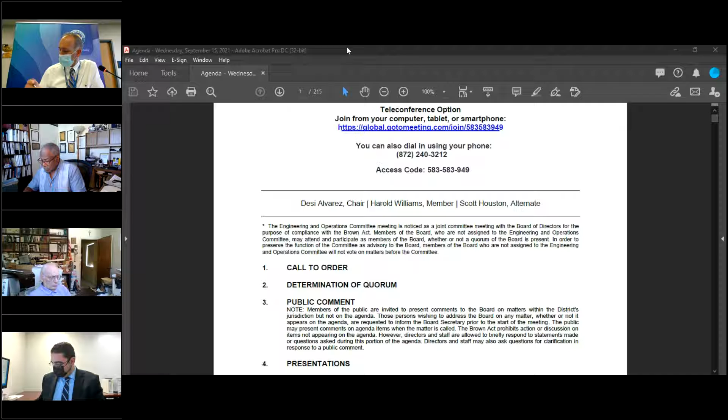Okay, we will move on to the action calendar. The first item up is item 5A. Mr. General Manager, would you like to introduce that item? Yes, Chairman Alvarez. Item 5A is a funding request for service connection WB-23 relocation. This item is related to authorizing the General Manager to have Metropolitan Water District develop a bid package for the relocation of a potable water service connection. Today we have Frank Fuchs, our Operations Supervisor, here to present this item.

Thank you, EJ. Good afternoon, directors. If I can please refer you to page 3 of your board packet, the purpose of this board memo is to request approval for additional funding of a project to relocate a Metropolitan Water District potable water service connection that serves Golden State Water Company in Culver City. I would like to highlight that this project is fully funded by Golden State Water Company. All Metropolitan Water District costs associated are passed on to Golden State Water.

Back in 2018, Golden State Water Company requested that the existing service connection WB-23 be relocated from the current Metropolitan Water District Culver City pipeline feeder to a separate feeder identified as the Sepulveda feeder. Golden State currently has a total of 3 potable water service connections that serve Culver City, and they are all served from the same Culver City feeder. In order to have backup supply when the Culver City feeder needs to be shut down, Golden State Water Company requested this project to relocate the WB-23 service connection to a different feeder, the Sepulveda feeder.

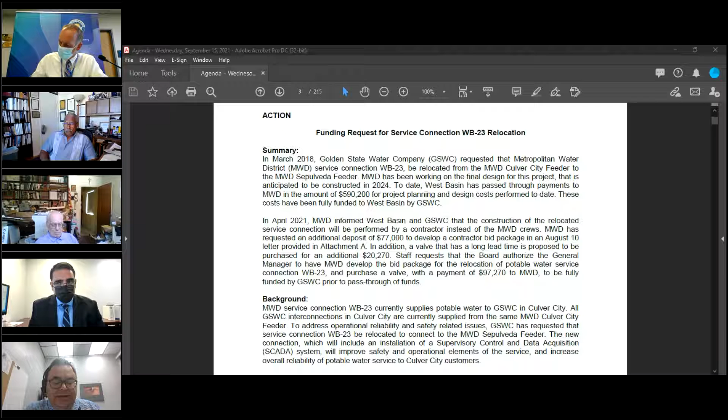A cost estimate of the project is shown in Attachment B of the board memo, and Metropolitan Water District has been charging for tasks as the project progresses. Again, all these costs are passed through to Golden State Water Company. The estimated project cost is $3,236,800. To date, West Basin has passed through payment to Metropolitan Water District in the amount of $590,200 for the study phase, preliminary design, and final design of the project.

Recently, Metropolitan Water District indicated that the construction work would be bid out instead of constructed by Metropolitan Water District staff as they had initially estimated. Unfortunately, Metropolitan Water District doesn't believe they will have the staff available to implement that work in-house. As a result, there will be an additional cost to update the design drawings and also develop the bid documents, for a total of an estimated $77,000.

In addition, a valve that has a long lead time will also be purchased for an additional $20,270, and therefore Metropolitan Water District is requesting an additional $97,270 for developing the bid documents and also for the purchase of this valve.

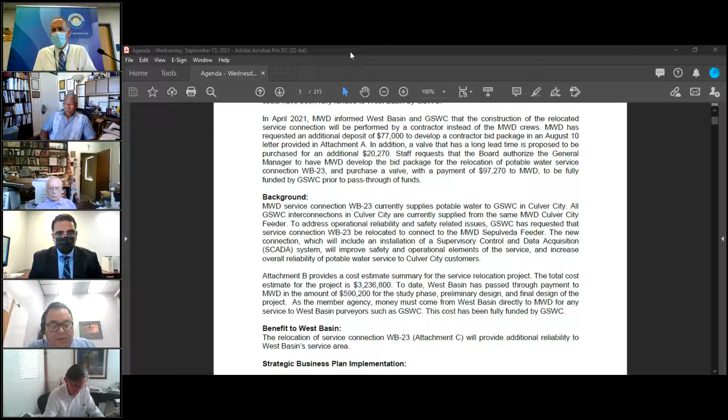I also want to mention that Golden State Water Company has already provided a payment to West Basin for that full amount. So now I'll read the recommendation: that the board authorize the general manager to have Metropolitan Water District develop a bid package for the relocation of potable water service connection WB23 and purchase a valve, with payment of $97,270 to Metropolitan Water District to be fully funded by Golden State Water Company.

With that, I'd be happy to answer any questions. All right, thank you very much. Any questions from the committee members?

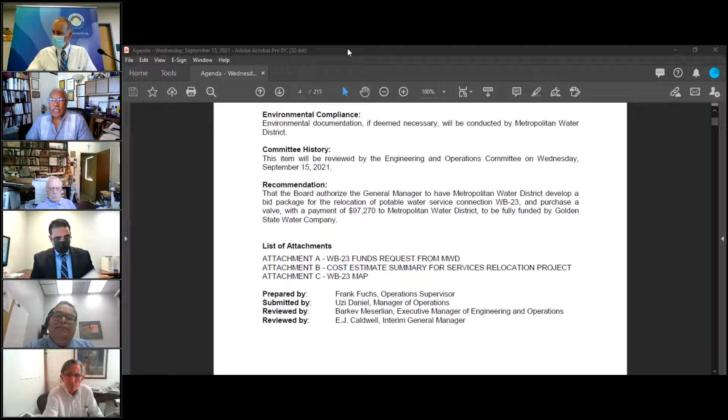Yes, Mr. Chair. I had a little interference and couldn't understand, I guess you would call it for this project, the fiscal impact. Am I to hear that there'll be none for this, for the district? Correct. All of the costs associated with the project are essentially passed through, Director Williams. Okay, well, thank you.

Okay, any questions from any other board members? Okay, seeing none. I have a follow-up question to Director Williams' question.

Since the overall project is a little over $3 million, and right now we're at the first part of this, and total payments are going to be an additional $97,270. Did I hear it correctly that Golden State has already given that money to the district, or is that going to be given? The additional $97,000 has already been paid by Golden State to West Basin.

So we already have a check in hand from Golden State for that amount. And then do we have an agreement with Golden State signed that says they will be fully responsible for the entire project cost? The way that Metropolitan Water District implements these projects is they initially provide just letters that identify the costs for different phases, but there will be an agreement before the construction is implemented between Metropolitan Water District and West Basin. And so we would have a similar agreement with Golden State before the construction starts.

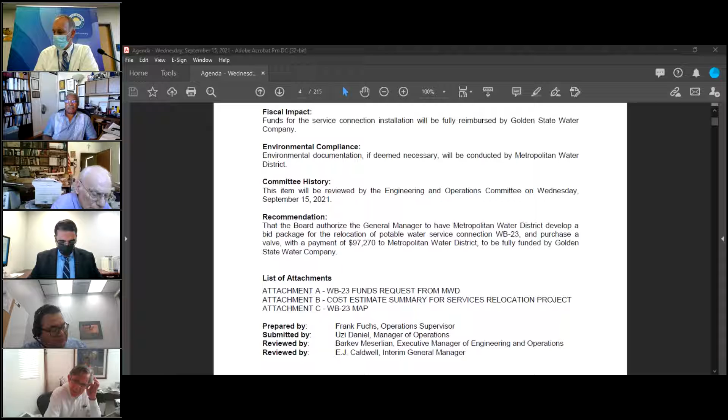Okay. If there's no other questions, should we move this to the full board, Director Williams? I concur. Okay, so this item will be considered by the full board at the next board meeting. Next item up is item 5B. Mr. General Manager, would you like to introduce that one?

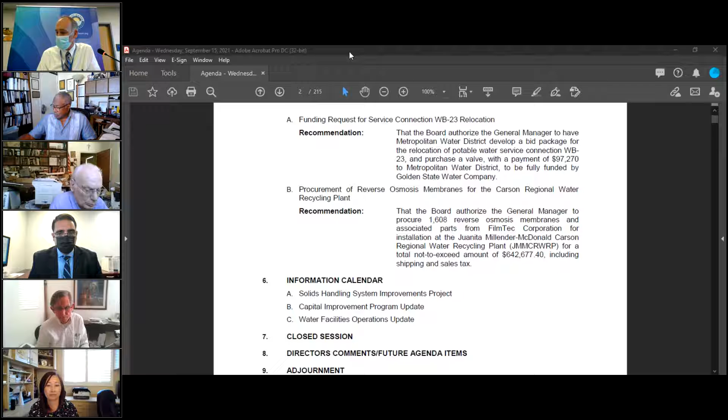Yes, thank you, Chairman Alvarez. The next item, 5B, is a procurement of reverse osmosis membranes for the Carson Regional Water Recycling Plant. This is related to the procurement of 1,608 reverse osmosis membranes. And for this item, we have Susanna Lee, our Senior Operations Engineer.

Thank you, EJ, for introducing this item. And good afternoon, Chairman Alvarez and members of the board. You can find a copy of the memo on page 9 of the packet. If you recall, it was mentioned during the July and August operation monthly updates that there will be a few upcoming membrane replacements. And so this item is the first membrane replacement action item for fiscal year 21-22.

Specifically, as EJ had mentioned, this action item is for replacement of the RO membrane at Juanita Millender-McDonald Carson Regional Water Recycling Plant, which I will refer to as JMM for short going forward. And as you're all aware, West Basin produces boiler feed water for Marathon Refinery. The RO system at this facility consists of 4 RO trains with a total of 1,584 RO membranes.

These membranes are 5 years old, because they were replaced in 2016. And they're due for replacement because they're reaching the end of their useful life. This is supported by our monthly review of the membrane dashboard, which shows the performance of the membranes is deteriorating, especially for a couple of water quality parameters, which are approaching the contractual limits.

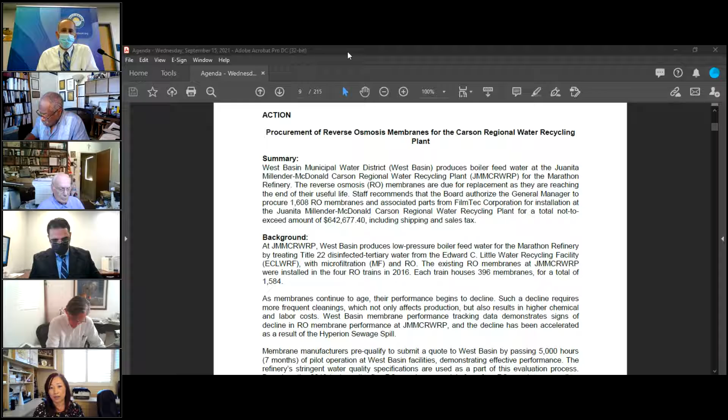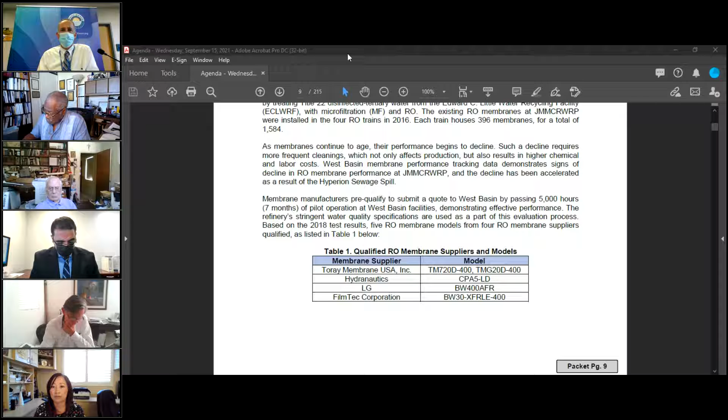Staff issued an invitation for quote to the 4 qualified membrane manufacturers on August 19th, and West Basin received quotes from 3 manufacturers. The lowest responsive quote is from FilmTec Corporation, as you can find the details of the quotes on page 10 in Table 2.

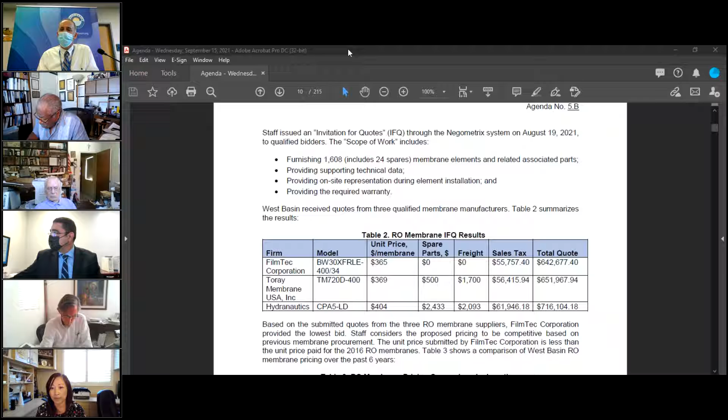Staff reviewed and considers the proposed pricing from FilmTec to be competitive based on previous membrane procurement. You can find those quotes and pricing on page 10 in Table 3 of the packet. The unit price from recent procurements ranges from $345 to $398 per membrane, and the unit price submitted by FilmTec is less than the 2016 unit price West Basin paid for the existing membranes. They also proposed the same price as for the Chevron RO membranes purchased in 2020.

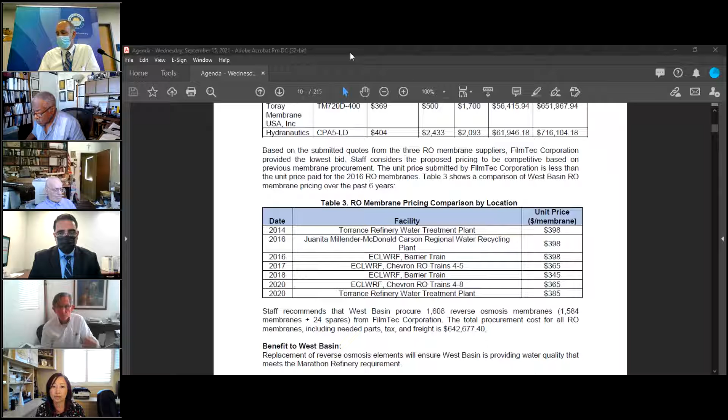So staff therefore recommends that West Basin procure 1,608 RO membranes, of which 24 are spares, from FilmTec Corporation. I would like to read the recommendation that the board authorize the general manager to procure 1,608 reverse osmosis membranes and associated parts from FilmTec Corporation for installation at the Juanita Millender-McDonald Carson Regional Water Recycling Plant, for a total not to exceed $642,677.40, including shipping and sales tax.

I'll be happy to answer any questions.

Okay, thank you very much. Director Williams, do you have any questions? Yes, I'd like to ask Barkev: are you totally satisfied with this? You have reviewed it, and this meets all your high standards?

Good afternoon, Chairman and President Williams. Absolutely, yes. The replacements are based on the information we have and the tracking we do, looking at the pressures, the water quality, and the contractual specifications we have to meet with our customer. We need to do this. So to answer your question, yes.

Okay, well, thank you, that's all I have. Okay, thank you. Any other board members have questions of staff? No. All right, seeing none, I've got a couple of follow-up questions.

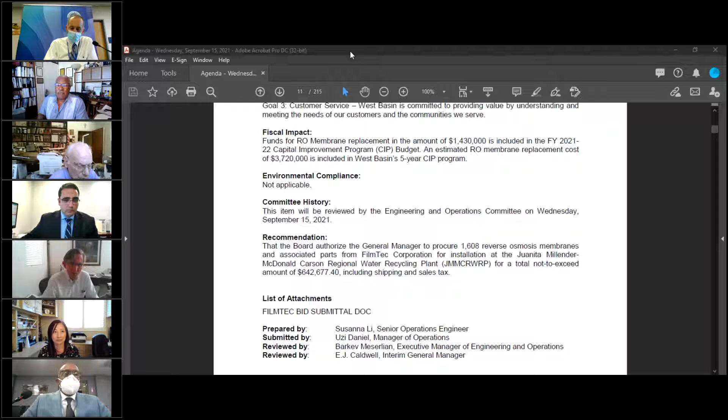It was mentioned that part of the reason for replacing the membranes is due to the upset at the Hyperion plant. Can you expand on that a little more? And as a result of that upset, is the replacement of these membranes being accelerated because of the extra duty they had to serve?

Prior to the event—let me step back. These membranes are 5 years old, and that's our normal useful life. So we were planning to replace these at the end of this calendar year rather than now. But knowing that we already saw a couple of constituents increase in concentration over the last 2 months, we know that the extra cleaning we did over this period contributed partly to these increases. So these membranes were set to be replaced, but we're just replacing them a couple months earlier.

Does that answer your question? That answers my question, and then a follow-up on that: would you be able to quantify what that additional effort is?

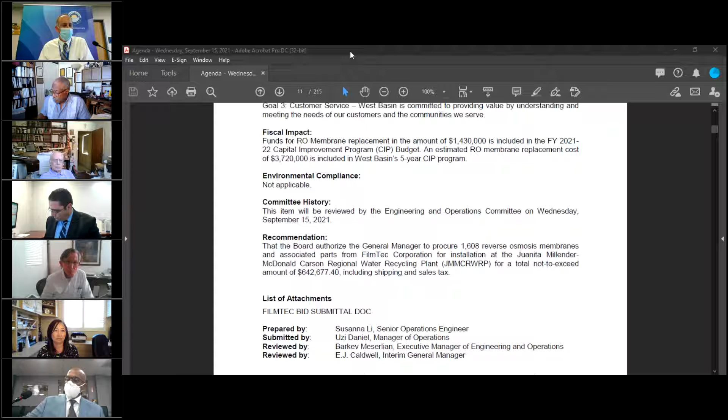Okay, next up is the information calendar. We have 3 items. The first item is the solids handling system improvements project. Mr. General Manager, would you like to tee that one up? Yes, thank you very much, Chairman Alvarez.

The next item is 6A, our solids handling system improvements project related to the RFP for services. As you may recall, at our July Engineering Operations Committee, this item did come up as part of our capital improvement program update. It was decided at that time, direction was provided to staff to continue to work on the draft RFP and bring it back to a future E&O committee for an update. We have that item for you today. Presenting this item will be Wendell Johnson, our Manager of Engineering.

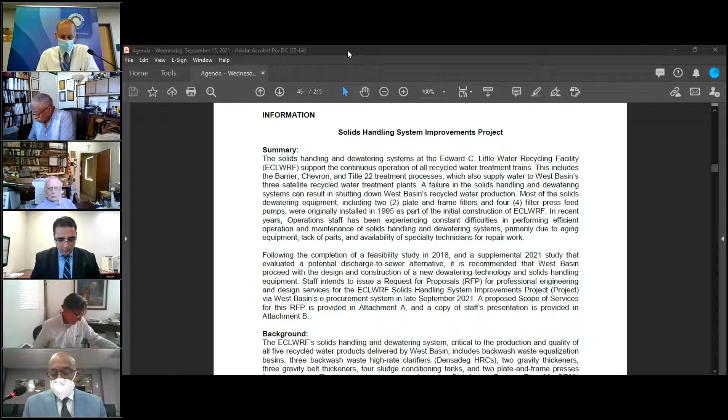Good afternoon, Chairman Alvarez and members of the committee and the board. Could you please turn to page 57 of your packet? I'm here this afternoon to provide the committee with information on the Edward C. Little Water Recycling Facility Solids Handling System Improvement Project. I will refer to it as ECL from this point going forward.

As you recall, in the July E&O committee meeting, Kevin Cullen provided a project update. The E&O committee provided comments and also requested to review the scope of services for the RFP for engineering services. I have attached a copy of this scope of services, which begins on page 48 of your packet. I'm going to go through some additional slides to remind you of the project and provide some additional information requested by the committee. Next slide.

The solids handling system at ECL is part of the backbone of the recycling water program for all the products that the district produces. Solids are generated from almost every process in the production of recycled water. The solids consist of total suspended solids, biochemical oxygen demand components of the wastewater, as well as chemicals added to facilitate the processing of recycled water.

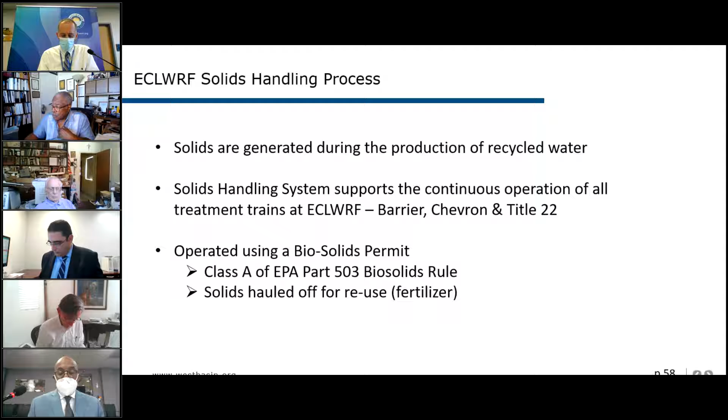This is an overview of the solids handling process. If you go to the rear of the ECL facility, you'll see a 2-story building, the tallest building on the facility, and that's essentially the dewatering building.

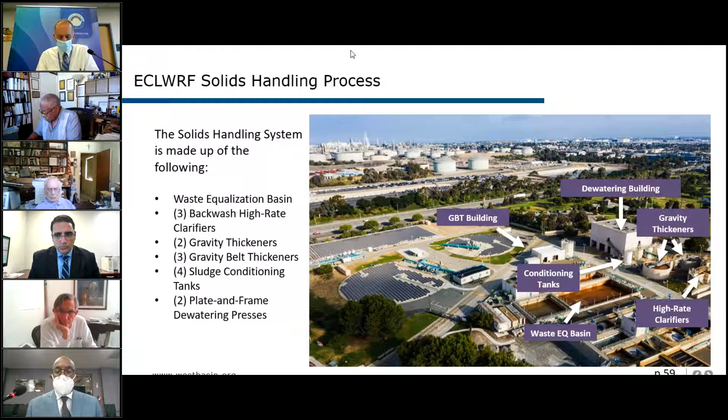The solids handling system includes the waste equalization basin, the high rate clarifiers, gravity thickeners, gravity belt thickeners, sludge conditioning tanks, and a plate and frame filter press for dewatering. There's a schematic on page 131 of your packet, which shows the flow of the water through the system. Next slide, please.

About the equipment - it was originally installed in phase 1, the original construction of ECL. It was retrofitted in 2007, which increased the capacity to handle solids from 50 tons a day to about 75 tons a day. The filter press and the feed pumps are the bottleneck of the system.

Generally, throughout the system, there's redundancy, except for when you get to these 2 elements that handle the dry sludge at the end of the process. The filter press and the feed pumps have been out of production since 2000. Spare parts are made to order, and they take about 6 to 10 weeks to delivery time.

The useful life, according to the State of California Controller's Office of Utilities, states that the useful life of this type of equipment is about 15 years, and this equipment has been in service for about 27 years.

The process is not automated. It is a hand process where you have to send an operator up to the facility to do what is known as running a batch, where the batch of sludge is dewatered and it's dropped directly into a waiting truck to be hauled away.

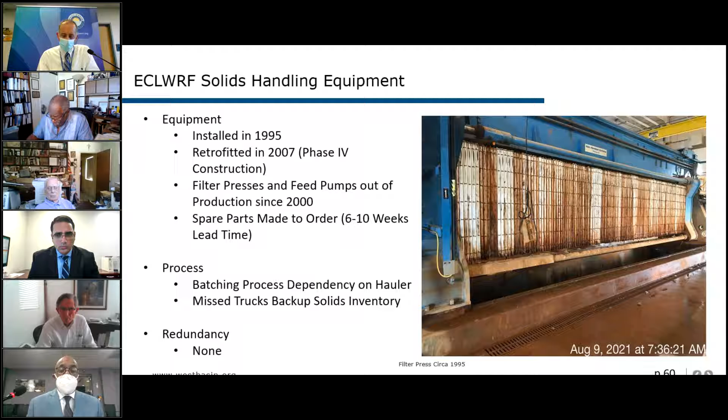In July of 2018, we completed a feasibility study and a condition assessment study. It was comprehensive. The study itself cost about $213,000 to produce, in addition to just a condition assessment of all aspects of the equipment that was in the solids handling process. It also took a bench scale testing of the pH compliance.

You have to take the sludge from about a 7.9 to 12 in order to transport the sludge, and this is accomplished by adding either a slurry lime or a dry lime to the system.

The report also took a look at 5 different possible alternatives of replacing the equipment and what the process would look like. It had a full-scale centrifuge pilot testing where a centrifuge was brought to the facility and operated for approximately 7 days, taking actual sludge being produced at the time and dewatering it to see how effective that system was.

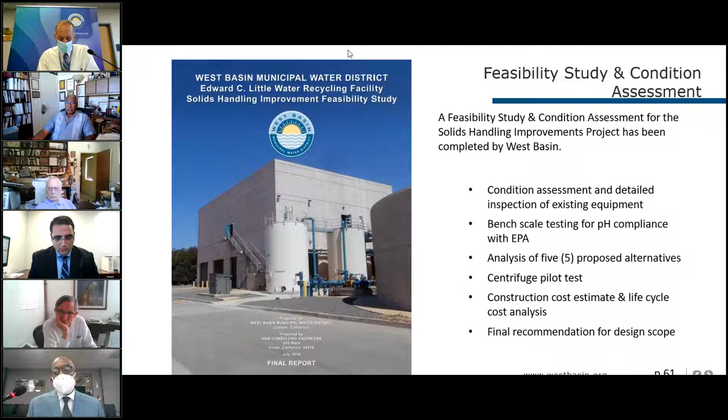Some of the conclusions of the study include that the buildings are in good condition. You have 2 buildings out there: the dewatering building as well as the sludge gravity belt building. The majority of the solids handling equipment is beyond its useful life, most of it originally supplied or part of the original construction of the facility.

The pH compliance could be achieved using lime slurry, dry lime, or caustic. There may be savings to switching the operation to dry lime because you're transporting less liquids to the landfill. So the recommended dewatering technology is a centrifuge with dry lime post-treatment used for stabilization of the pH of the sludge. The recommended technology is effective on the thickened sludge, and this was a conclusion drawn from the successful pilot study at ECL.

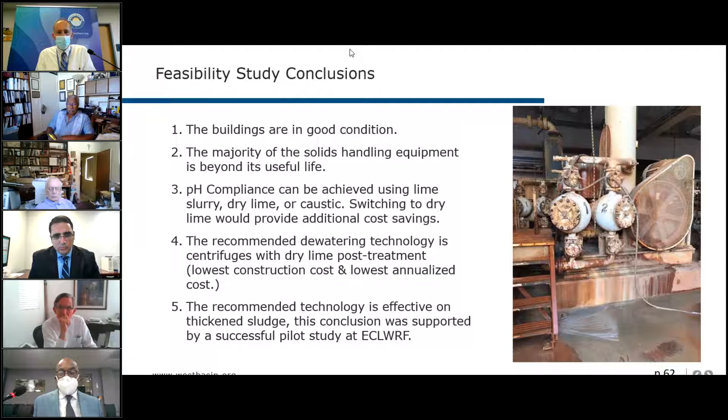In addition, in order for us to do our true due diligence, we took a look at a sewer discharge study, which was a feasibility study to see if the actual solids, instead of having our own solids handling operations at the plant, could discharge into the county facility. This report is included in your agenda packet, on page 138.

The conclusion was based on the conditions: the blending project didn't seem feasible or cost effective compared to the capital project. We had a couple of constraints. We were looking at 3 different waste streams and blending them together to discharge into the county's system, and part of the constraint was the capacity of the existing system. The capacity was only 60 gallons per minute, while our discharges were producing between 116 and 136 gallons per minute.

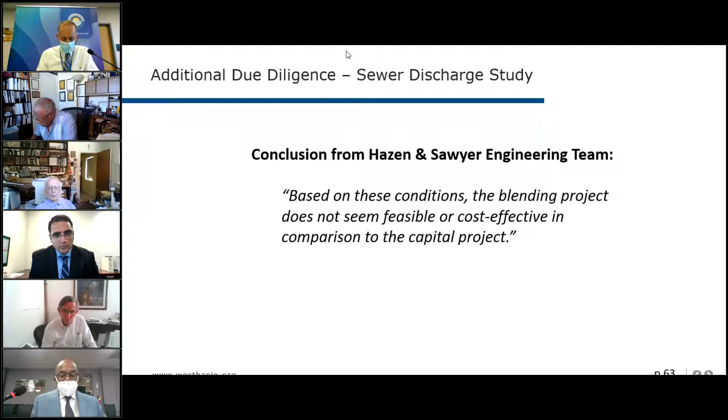We have attached a scope of services for the RFP, beginning on page 48 of your packet. There are approximately 6 tasks involved in the design of this project. You have your typical general coordination and project administration, where they meet with West Basin and Suez and discuss the design and get data back and forth.

The site investigation includes a physical visit to the site to do the preliminary design and layout of the facilities using site constraints, as well as reviewing some of the reports produced along the way, certainly the feasibility study as well as the sewer connection study.

The preliminary design report, or PDR, is approximately a 30% design, where most of the core elements are known about the project, meaning there's a good cost estimate of the project. The process has been designed, the facility has a preliminary layout, and there's cost estimates for the equipment, processes, and cost of operation.

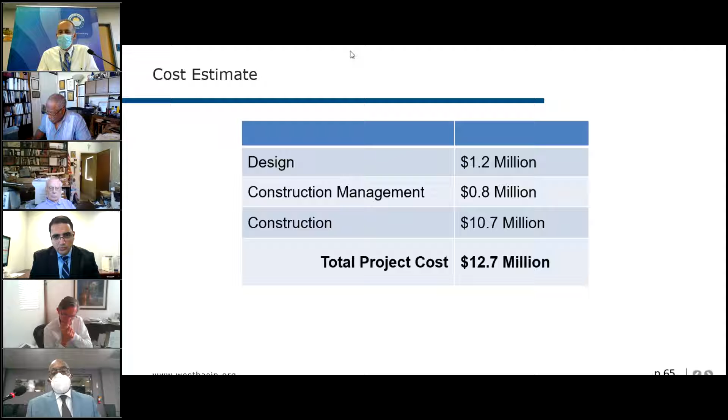So the funding sources, and this is kind of important. In the new contracts for both Chevron and Torrance, there's a capital project charge as part of the rate, part of the monthly service fee that organization pays West Basin. These projects are listed as part of the tasks to be done between 2021 and 2027. The refineries have committed approximately $2.9 million towards this project. Our engineering department will be looking for other grants, to be determined, and approximately $9.8 million would be financed.

Okay, the current milestones for the project. We plan to complete the RFP for engineering services by the end of September. This is one of our stops along the way for comments from the E&O committee. We expect to award a design contract sometime in December, and the final design is expected in July of 2022. We'd like to award the construction contract in the fall of 2022, and the construction period is approximately 12 to 18 months, depending on the supply chain and some of the equipment that's available. So we'd like to see the project completely commissioned in mid-2024.

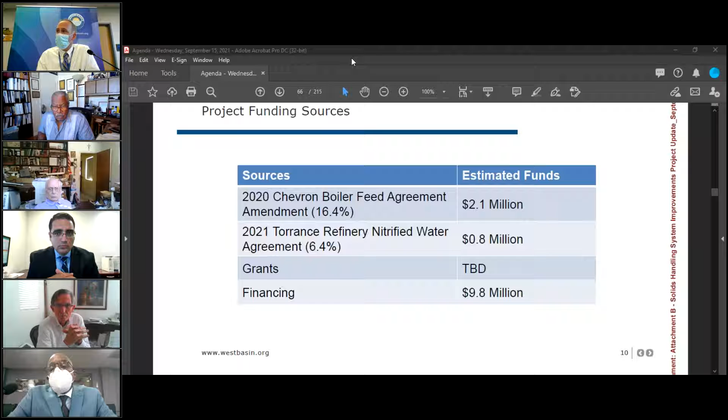I believe in the RFP or in the project study, we're probably looking at how do we get to 70 million gallons per day. It may not be part of this particular project, but we would be looking at space within the facility for future expansion of the solids handling based on the current amount of solids generated at the facility.

Okay, so next question, as a follow-up: both right now Chevron and the Torrance refinery are helping pay for this, but the water produced at the Ed C. Little facility also goes to the Juanita Millender-McDonald plant and is there for the Marathon refinery. So part of the treatment here is also benefiting Marathon. Is Marathon, I don't see them listed here, or are there discussions going on with Marathon to participate in funding this project?

There has been discussions with Marathon, not specifically for this project, Chairman Alvarez, but specifically about putting together a framework to extend their agreement with us. Their agreement with us terms out in January 2025. So they have an agreement already with some contractual obligations for West Basin to give them a certain spec of water, and they do have some fixed charges in there that were based on the original construction of the facility. They do have some commodity charges in there, but because it will term out later in the future, we're not necessarily in a place right now to negotiate this new setup that we have with some of the other refineries.

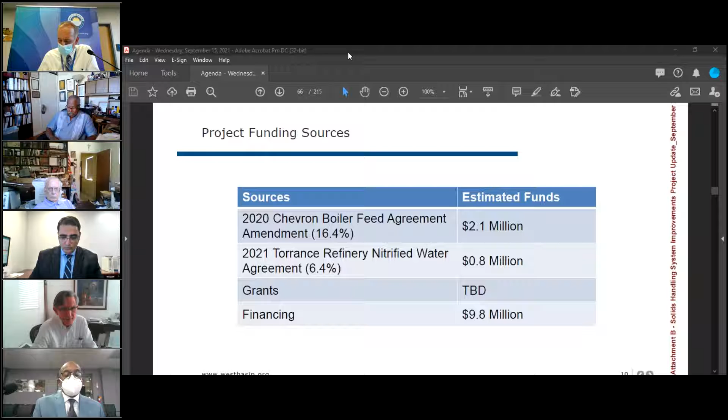I think in the schedule, you guys had shown that you wanted to get the proposal for the design portion out by the end of the month of September.

On that, there is in the RFP a first step, which is the preliminary design report. I think that preliminary design report, specifically for this project, is probably more important than it generally would be.

Whatever consultant is doing the work really needs to focus on reevaluating the solids handling facility, looking at the total capacity of the Ed C. Little plant and the future capacity, because we are limited to a degree. We have quite a bit of land, but we've built on quite a bit of land too, so we have some land limitations. I think long term there is a desire to expand the capacity of that plant at a higher level of treatment than we currently use.

So I would like the proposal to be expanded a little bit more before you guys get it out in the next couple of weeks, to really focus on that preliminary design report so that the consultant evaluates the existing feasibility study, the blending study, other documents, and the overall operation of the plant.

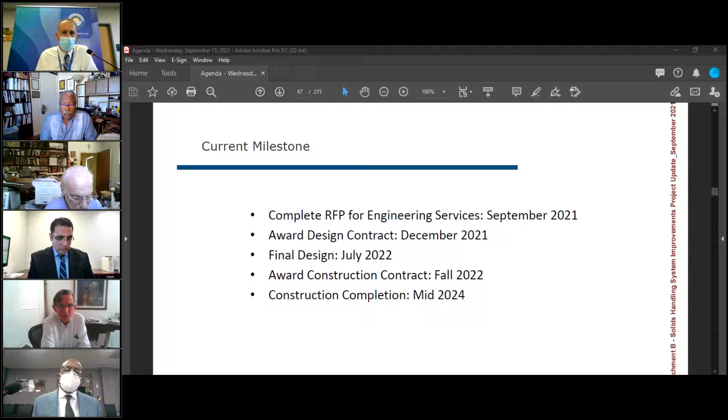Okay. So with that, let's move on to the next item, the capital improvement program update. Mr. General Manager, would you like to tee that one up?

Yes, Chairman Alvarez. The next item, as you mentioned, 6B, is our capital improvement program update. This is a monthly recurring update. And again, we have Wendell Johnson, our manager of engineering, here to present this item.

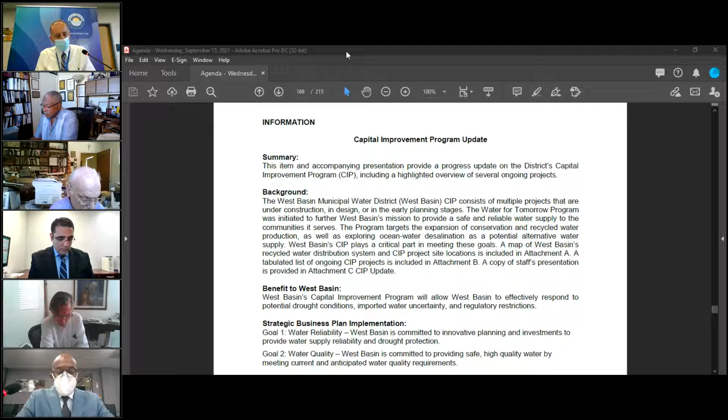Good afternoon, Chairman Alvarez, members of the board and members of the committee. I'm here this afternoon to provide a CIP program update on certain projects in the CIP program. This format is different from what you've seen in the past, and I'm testing the waters with this format. We're presenting projects moving forward, and individual milestones that we've hit this month or will be hitting in the next few months, to give the board a heads up of what projects are coming in the pipeline and where we are in the development of the project. So, next slide, please.

Back in July, I presented on the DLD building, and we were directed by the committee to onboard a real estate appraisal service to look at the value of the building so we can determine what level of capital investment we want to make, or if we want to sell the building and relocate. We successfully brought on a real estate appraisal service through an RFP issued mid-August. They responded September 2nd, and we've got a responsible proposal from a service out of Torrance. We will be moving forward with that. In addition, managers are looking at a needs assessment to determine what square footage each department requires in order to function.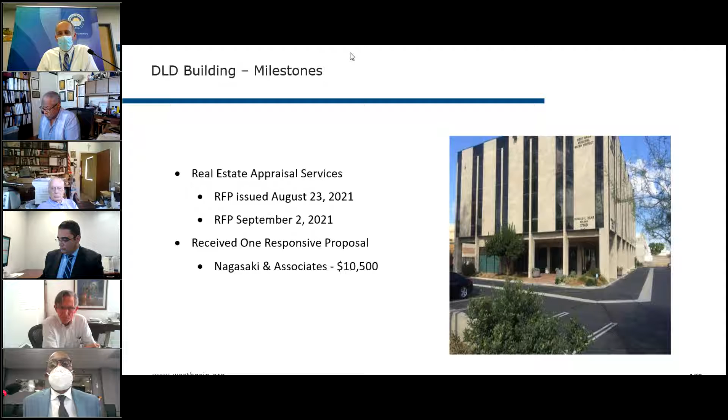If I could interrupt for a second - can we go back to the previous item? On that one, you received one proposal for doing a value estimate of the building. Did you say you're going to move forward with hiring that firm? Correct. Can you please send the board a copy of their proposal? Sure, no problem. Any additional questions? Not right now, just that request. Thank you.

Just an update on something coming down the pipeline in the next month or so. This is a project, a program that's been quite fruitful for the agency - it's called the Harbor South Bay Water Recycling Project. This project is a partnership between West Basin and the U.S. Army Corps of Engineers. There's approximately a $35 million agreement on the first leg of the project that constructed a considerable amount of distribution system for the agency. We're right now reviewing an agreement that we're going to amend, for an additional $35 million for future projects.

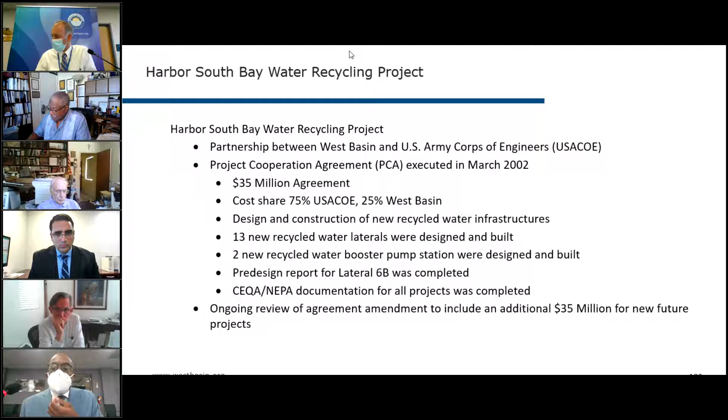This is a list of successful projects that were completed under the first agreement, and we are developing a list of future projects or extensions of the distribution system that we will include in the next agreement with the Army Corps of Engineers. Any questions about that?

Just a clarification - these are projects that are already done? Yeah, these are completed projects. So the $35 million, you're going to identify future projects? Correct. We do not have that list now - we're using the master plan. We don't have that list completed right now, and we're utilizing the recently completed master plan to determine which projects we would place on that list.

And the list is kind of fluid with the Corps. We give them a list of more than $35 million worth of projects, and you're able to put new projects on there, remove some, add additional ones. So it's quite flexible, and it takes a little time for them to get it done. Generally, the $35 million is probably over a 10 to 15 year program time, depending on the value of the project. And the $35 million we talked about earlier, that money's all been spent on these projects? Correct. So the $35 million we're talking about now is a new agreement. We have no money at the Corps of Engineers until this new agreement is executed.

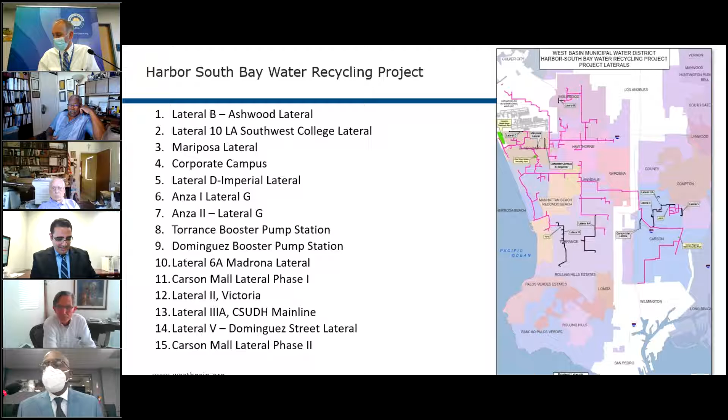All right, with that, let's keep moving on, because otherwise it'll be like other times and we'll end up going way past here. So Wendell, my apologies, keep going. No, your comments are very useful, Director. Next slide, please.

This is an update for the Title 22 converted filter booster pump station. As you may recall, we're in the process of renovating or rehabbing the Title 22 filters. One of the large components of this project is the Title 22 converted filter booster pump station. This project will enable us to increase the filter capacity of the converted filters by 3 times. Currently, we're only using half of the filters because of the hydraulic difference between the filters, and we're only producing 2.5 million gallons a day, and the filters have a capacity of up to 10 million gallons per day. This booster station will allow us to do that.

Currently, we received 100% plans for the project, and that's under review by staff. We're on track to put this out for advertising in October of this year, and we hope to award the contract for the construction of the booster pump station in November of this year.

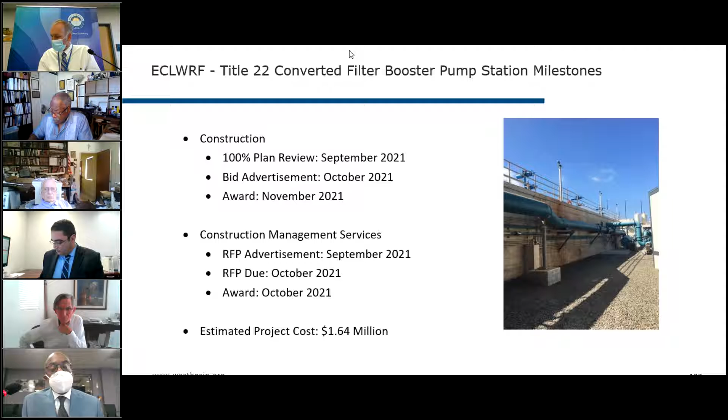I think we touched upon the PV recycled water pipeline project, and this is an estimated time frame of the project. As you may recall from an earlier project update, we talked about splitting the project. It was originally a pipeline and pump station project combined, and we separated the projects this summer, and we're at 100% design on the pipeline.

It's currently being reviewed by West Basin, and it's out to the various jurisdictions in the permit process. We received a renewal from Caltrans very quickly, and I know the county and both the city of Torrance as well as the city of PV will be taking a look at the permitting of the project. That is the critical path to get this out on the streets. We're expecting to start the bid processing in October, November, and hope to award a contract for the pipeline in December of 2021.

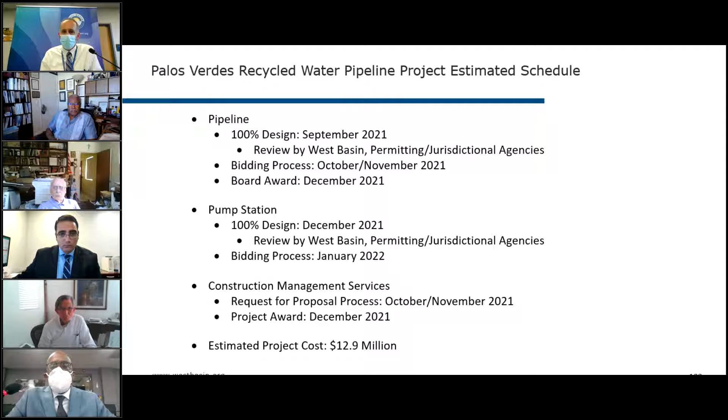Okay. Okay, Wendell, keep going. Next slide, please.

Over at the Torrance Refinery water recycling plant, we have a couple small projects. We had an issue with an eroding channel used sometimes once a year or every couple years during excessive rainfall, which is undermining some pipe supports and has potential to undermine the tank. We've developed plans and specifications for a retaining wall to prevent the erosion, as well as to address a backflow device that has exceeded its useful life—it had to be repaired this year and we were told the device's useful life is coming to an end. The design package is nearing completion, and we anticipate advertising for construction in October of this year. The total project cost is about $320,000.

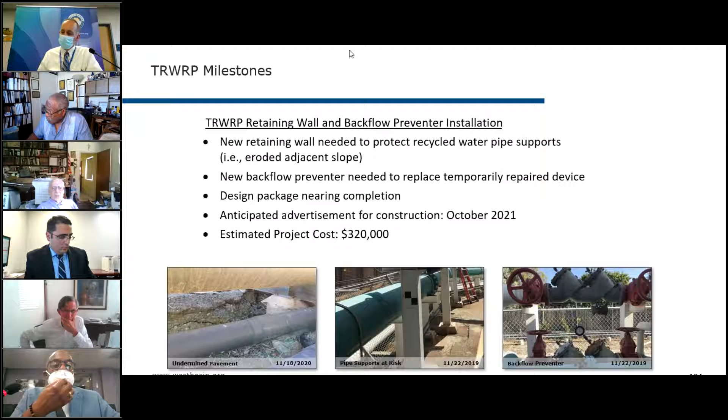This is very visual, one of our most visual projects out there. After a lot of delay with the trucking industry and availability of resins to create the tank, this project is finally coming to near completion. We were able to set the 2 additional tanks—they arrived on the 20th of August and were installed that same day. We're happy to announce this project is coming to an end, and our expectation is that it will be complete and a notice of completion issued by the end of October 2021.

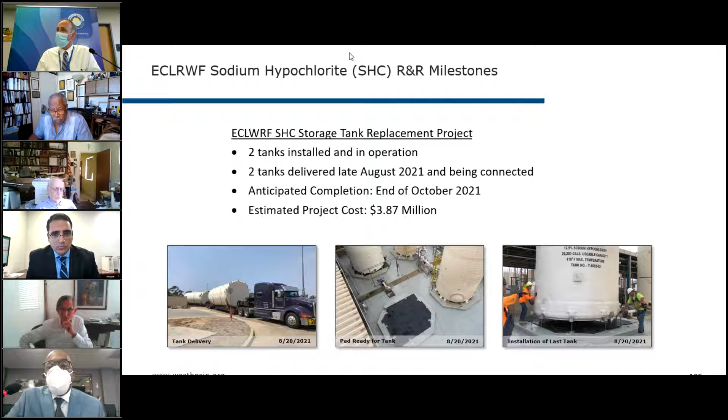Any questions on this project? No. Okay, next slide, please.

This is a heads up project. Recently, during a routine inspection of our facilities, the day tank—which is filled from those 4 tanks shown in the previous slide—was found leaking, and staff is looking at the most economic solution to this problem. The tank itself was installed in 2007 and has about a 15-year life expectancy. We're looking at ways to either repair or replace the tank, and a timeline to do so. It's not an emergency repair, just urgent. This is part of the storage tank project for this fiscal year, but we're moving it up because Suez discovered leaks during a routine inspection of the facility.

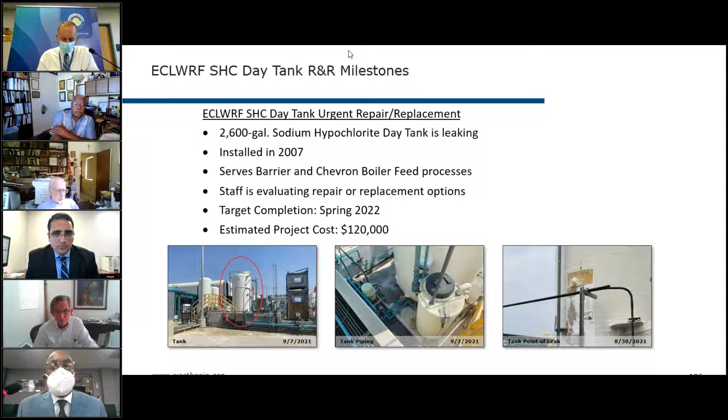Any questions about this project? Next slide, please.

One of our largest projects the department is handling right now is the JMM Carson Phase 2 expansion project. It has finally started to mobilize—we have our stormwater permit in place and our field offices set up. Currently, the contractor is doing potholing, locating the tops of the utilities out there. We also have a partnering session coming up October 1st with key players: West Basin, Suez, the labor compliance group, the construction management firm, and the contractor. This project is starting to get some legs, and we're starting to see boots on the ground. We're happy to report we're moving forward with this project.

Any questions on that?

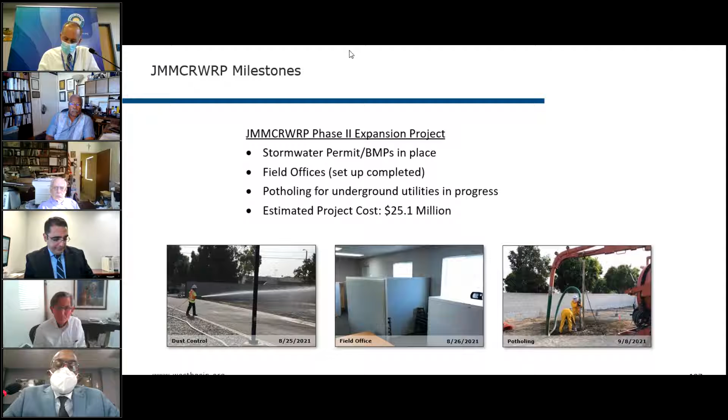We are happy to report that we met with Chevron under the Joint Management Committee meeting, which was in August of last month. One of the projects we updated the refinery about was the solids handling project. We also presented projects that were completed or near completed that are part of their fixed charges for capital improvement, including the Hyperion secondary effluent pump station with new pumps 5, 6, and 7, as well as the storage facility for sodium hypochlorite, the 4-tank farm project. We also talked about the pending CIP and R&R projects going forward, and other needs that are not part of the agreement. We identified those things.

We talked about the West Basin assets on Chevron's property, the background on those tanks on their property, the maintenance agreement, as well as the condition assessment. Our next step is a follow-up meeting in October to continue this dialogue with the refinery to keep them updated on the capital projects. I believe that's my last slide in this presentation.

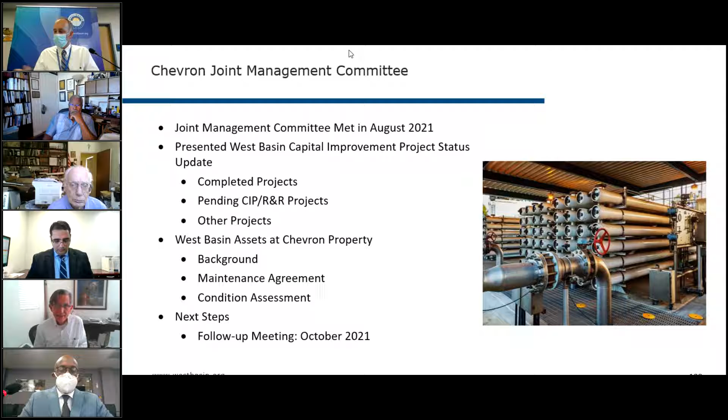Okay, if that concludes that presentation, are there any questions from the board or comments? Okay, seeing none, I just want to point something out to you.

In the projects you just summarized, if I add up all the budgets presented, that's $43.95 million. Most of those are estimates; some costs may come in under, some over. Last year's net revenues after expenses for the district were $9.9 million, so any expenditures beyond that had to come from borrowed funds. This year, net revenues will probably be less because water sales are lower due to water conservation, which overall is a good thing, and we've had additional expenses dealing with the impacts of the Hyperion upset. So our net revenues would have been estimated close to last year's. Without other CIP money that the district may have to contemplate, we're looking at substantially more exposure than the revenues we have. I would like us to really focus on how we're going to fund these projects, or what projects we're not going to be able to do because we can't afford to fund them.

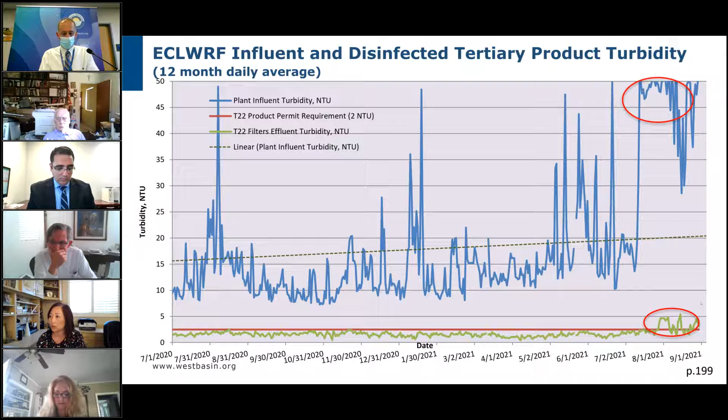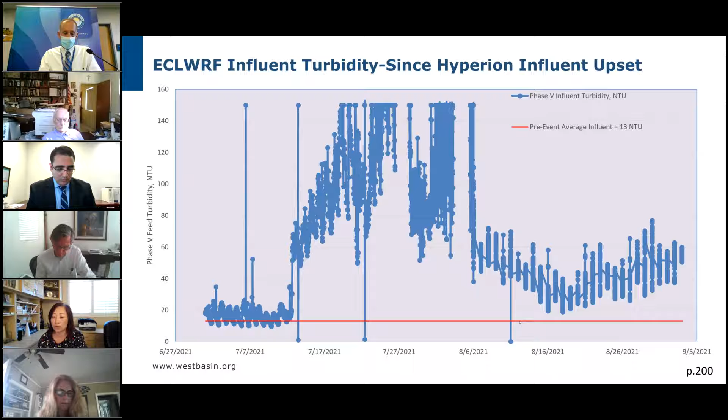The next few slides will highlight where we are operationally, and go over some of the water quality concerns that we're still facing. So we start off with discussing water quality.

As I mentioned, we're still in highly unstable operational conditions. We're seeing 4 times as high turbidity in the month of August and 3 times as high TSS. The significance of TSS, total suspended solids, is that we're producing perhaps 3 times as high solids going through our solids handling facility.

The chart highlights that Hyperion effluent has improved significantly. For TSS, they were as high as in the 300 to close to 400 range, and effluent was up at 150 NTU. But I want to point out that even though they have improved, the water coming into our plant at Edward C. Little is a lot different and is not a one-to-one comparison.

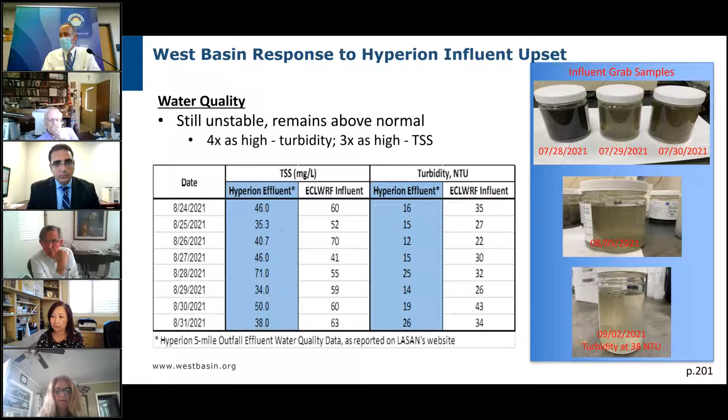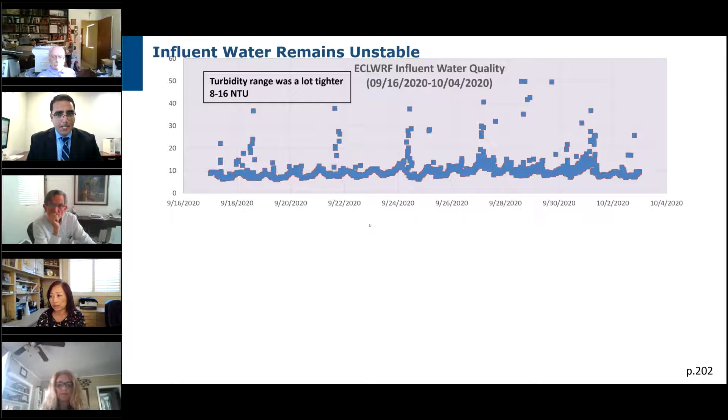Another slide just shows how unstable our water quality still is. This top graph highlights what a normal turbidity range looks like. This was last year, back in September to October 2020, where the turbidity range was between 8 to 16 — a lot tighter compared to what we're seeing currently in August to early September, which ranged between 20 to 50 NTU.

So even though Hyperion water is improving, it's still a long way for us to get back to normal operation mode.

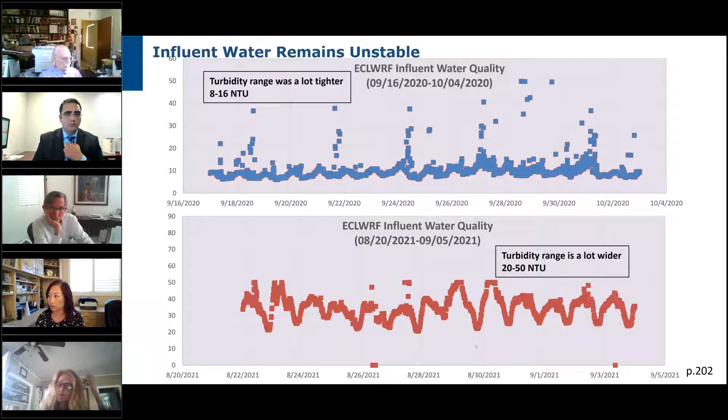Just to go over quickly some of the challenges we are seeing operationally: as I mentioned, water quality is still fluctuating daily or hourly. We see a huge swing between nighttime and compared to morning time.

The second item is the ability to clean all those extra solids. We were seeing 3 to 4 times as much solids coming in. A lot of those solids — one of the difficult challenges for our facility, unlike others, is that a lot of solids are just recirculating within our system, overloading us. So if we miss a truck at the end of the treatment process, it really affects our process up front. That's a huge challenge we're facing.

The third item we're currently experiencing is chemical shortages due to trucking issues and delivery of supplies, particularly ferric chloride. So we have to limit our production currently, which results in using potable water at our satellite facility, as well as internally. We rely on potable water to supplement our disinfected tertiary and other product lines.

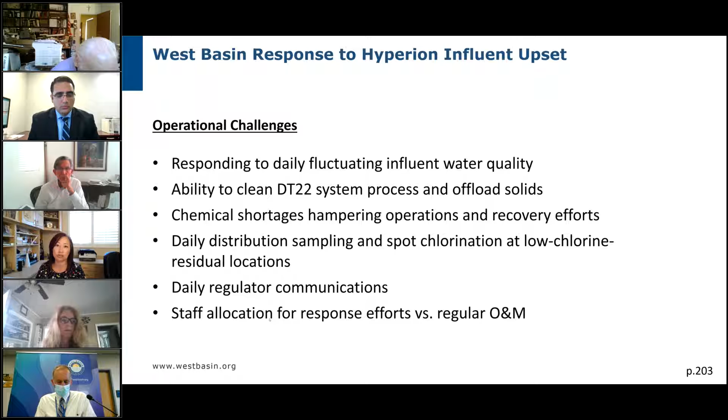And finally, we are just trying to allocate response efforts versus regular O&M, because we still have a plant to operate, and there are regular PMs versus CMs that need to be completed in addition to all the additional response efforts.

Here are some pictures just to highlight what we are dealing with. These are pre-treatment, high-rate clarifier photos — all the solids just get stuck and recirculate in the pre-treatment at the beginning of our treatment process. You can see oil and lots of solids, and even septic conditions.

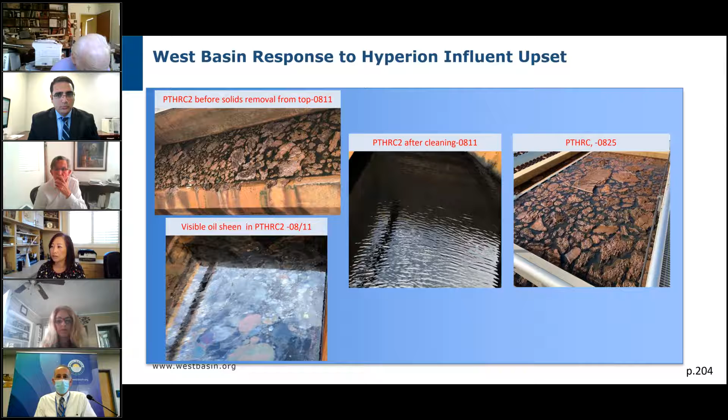Another slide showing photos, even up till the end of August — you can see there's a lot of foam in the filters, and even foam in our phase 4 membrane basin. These foams are fouling our membranes. The phase 4 submersible membranes are due for replacement next year, but we are actively evaluating their performance, and we may need to replace this membrane a little sooner than planned.

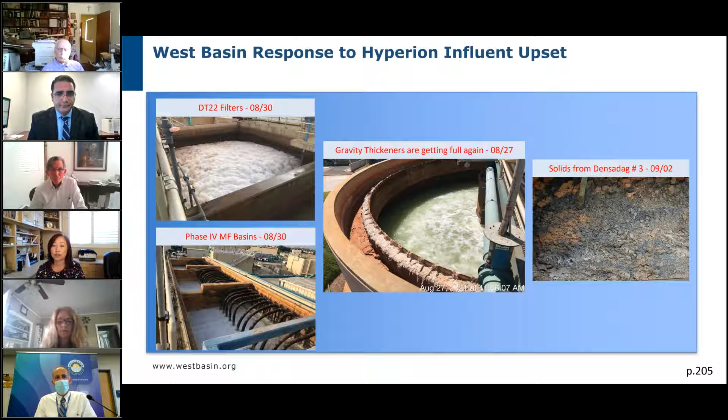And here this is just showing some solids at our back end, and we're trying to remove them using extra vacuum trucks and other ways to help ensure the solids don't get recirculated back to our system.

And here is our monthly maintenance highlights, and I just want to commend the SUEZ staff for keeping our facility up and running, even with all the additional responses.

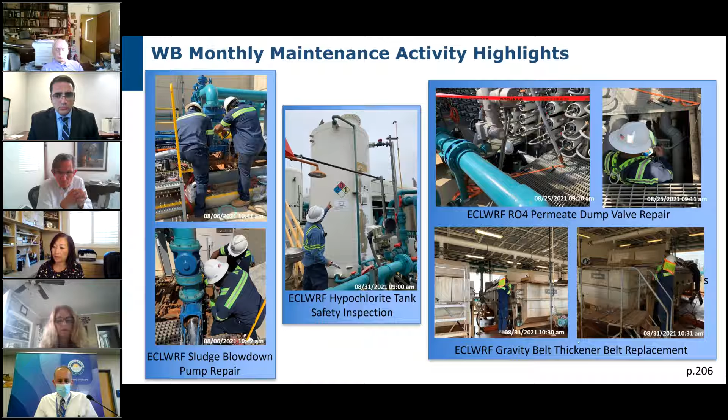Because of the additional solids, it took a hit on some of our sludge handling equipment. These photos on the left show staff replacing a sludge blowdown pump. The photo in the middle is the hypochlorite tank safety inspection where we discovered the tank issue. Finally, on the right, we have items on RO4, one of the Chevron RO trains, a dump valve repair, and a gravity belt thickener belt replacement on the bottom.

With that, I'll turn it over to Uzi to continue with the compliance report.

Thank you, Susanna, and good evening, directors. I'll take this opportunity for another pat on the back to all our operators. As Susanna showed in the update, in addition to all the response and recovery effort going on, there's also regular maintenance and things that come up even on the best days.

Some of you may have heard about the power outage at DWP. That did affect us. On Sunday evening, there was a large accident that took out about 300 customers, including our Hyperion pump station. Staff responded wonderfully, many up until dawn the next morning. This wasn't related to the Hyperion upset, but shows there are other things that come up. It's a celebration not just for operators but for all of us at West Basin, including the board, for showing we are prepared, take pride in our job, and are willing to respond when necessary. We will highlight this event in next month's presentation with some great photos.

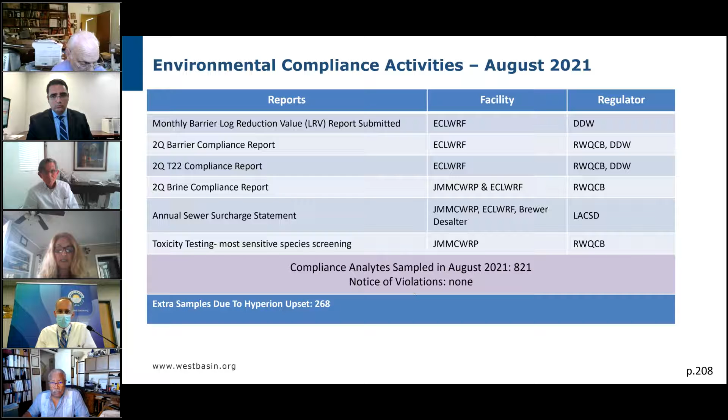I'll also take advantage of this to mention what we submitted as a draft: our 5-year engineering report. That's a very large report required to be updated every 5 years per the permit and groundwater recharge regulations. It was done in-house by Jamie Burkhardt and Susanna as signature. We also utilize our contractor hydrogeologist, which requires review and a stamp from them, but it's a great example of teamwork. We hope to get it finalized and submitted to the regulators, and we're always happy to share it with any directors who'd like to see it. Again, another great effort showing the diligence of our staff.

Next slide, please. And on here, I can go ahead and turn it over to Frank Fuchs to highlight a lot of our customer service and potable water programs.

Thank you, Uzi. Good evening again, directors. As Uzi mentioned, this is our potable water customer service update, starting with the work we support our purveyors with on Metropolitan Water District customer projects. As I discussed earlier in the action item, the first one is a WB23A new service connection, but I want to highlight the project for WB30 and 31.

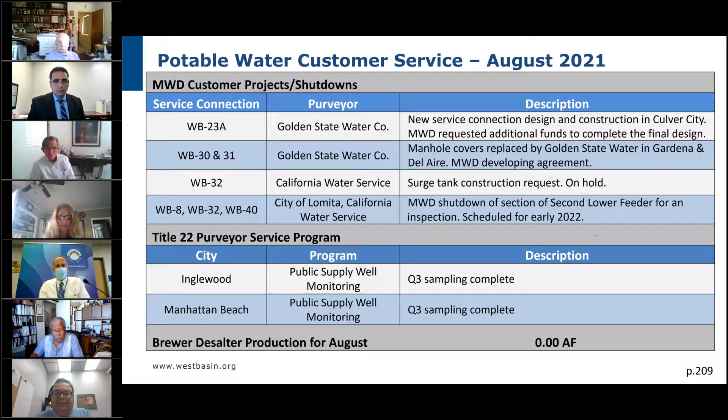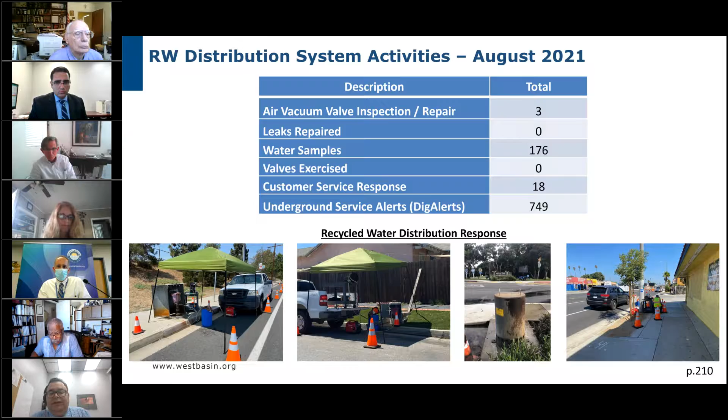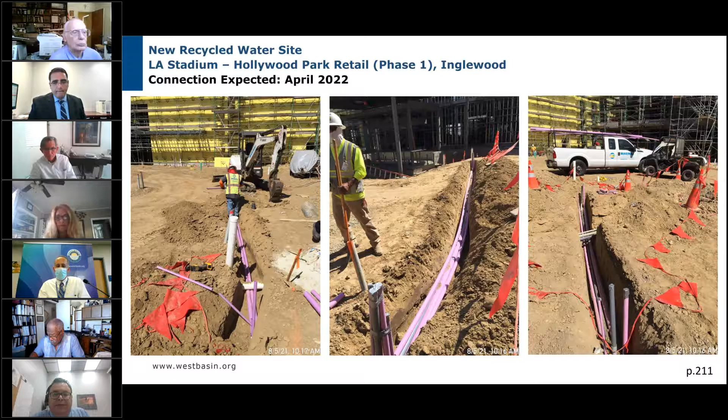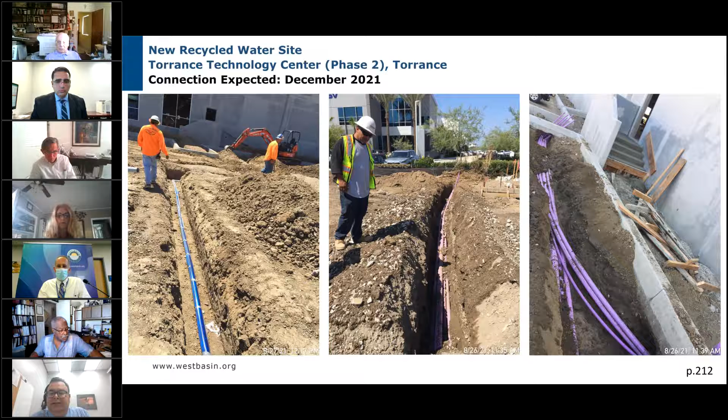Another new recycled water site our staff is working with is the Torrance Technology Center, Phase 2, the former Toyota North American headquarters site that's being redeveloped. This site will have 4 new connections. It's also a commercial type office setting, and recycled water will be used for the perimeter of the buildings and in the parking lots. It's anticipated that the irrigation for the site will be connected by the end of this year. Here you can see photographs of recent inspections of the irrigation system.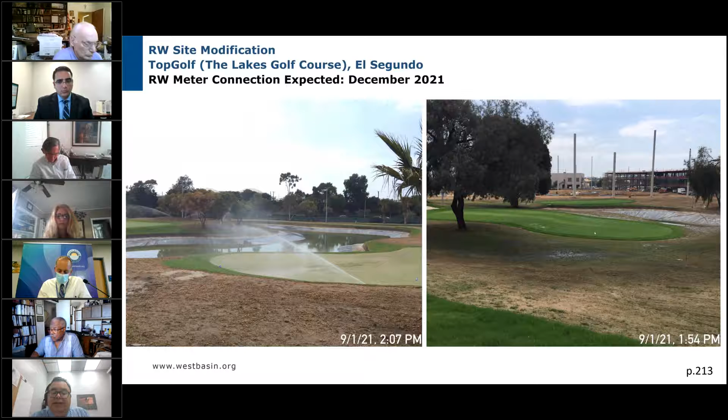We also continue to work with Topgolf next to the Edward C. Little Water Recycling Facility. They've already completed construction of the new irrigation system for the golf course, and are still working on the irrigation system next to the driving range. Staff is working with the Department of Public Health to conduct these inspections, and it's anticipated to be connected by the end of this year.

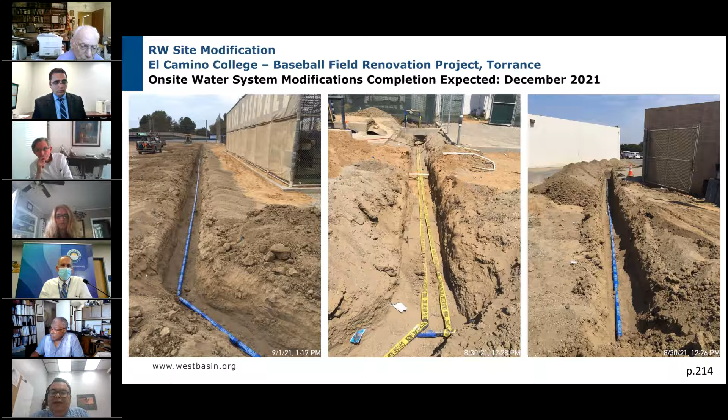Finally, another recycled water site modification is El Camino College in Torrance, which currently uses recycled water. Unfortunately, at one of their baseball fields, they're going to be installing artificial turf, and any modifications made to an existing recycled water site or to their potable water system have to be reviewed and approved. Staff is working with them and the Department of Public Health to ensure these modifications are made safely, and it's anticipated to be completed by the end of this year. That concludes my update, and I'd be happy to answer any questions.

Okay, thank you very much. Are there any questions from the committee or the board? None here. Thank you very much. Any other board members? No? Okay, so I think we're done with the

Information calendar. Next item is closed session. We don't have a closed session item.

So we'll move on to director's comments and future agenda items. Any comments? Director Williams? No, thank you. Director Deere? I commend the staff for a fine report, a set of reports, and that the chairman only took 2 hours for the meeting. Thank you. Director Gray?

Okay. If there's no further comments, then I would like to piggyback on Director Deere's comments about it taking 2 hours, it being just a minute after 6 now. We will adjourn the meeting. Thank you all. Bye. Thank you.